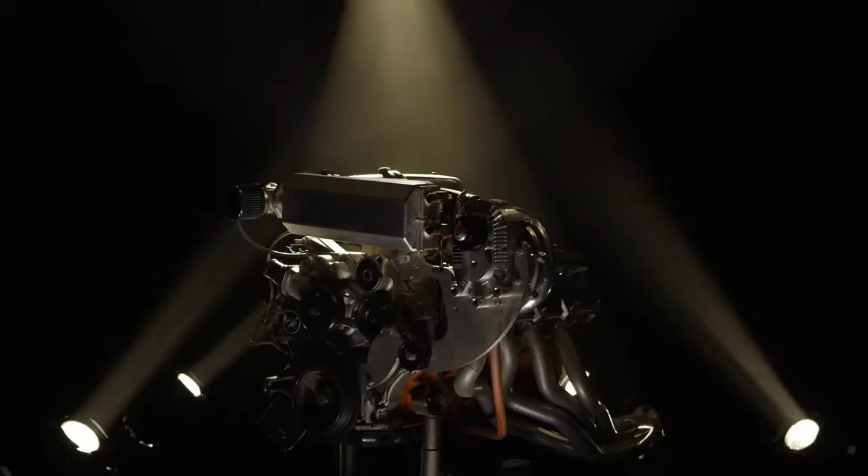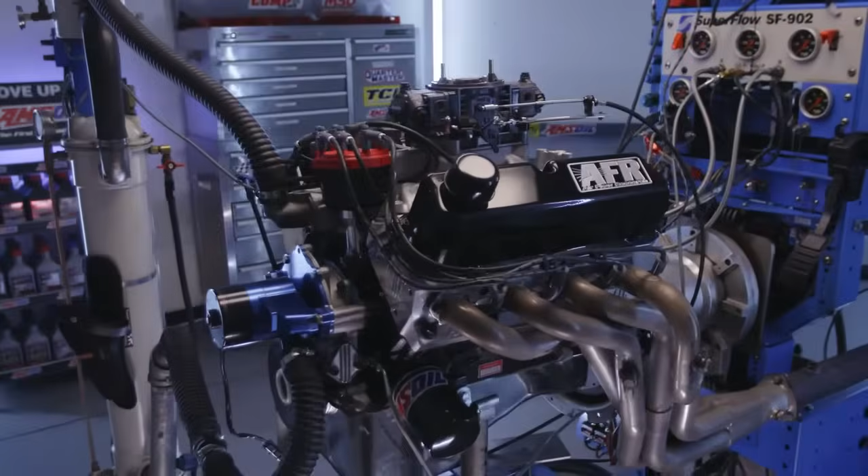This episode is going to be a deep dive on how to buy the right cylinder heads for your engine. And actually, the data here is being applied to a small block Ford, but really, it's kind of broad across any engine family because all we're dealing with here is airflow and the dynamics of the volume and the cross-sectional area of the intake port.

And we're doing that specifically by testing 3 sets of Airflow Research Renegade cylinder heads. Now, one of them has a 165cc intake port, one of them is a 195cc, and one of them is a 220. Now, the common internet theory is that you can put too big of a head on your engine and therefore lose bottom end torque, and that's what we want to find out.

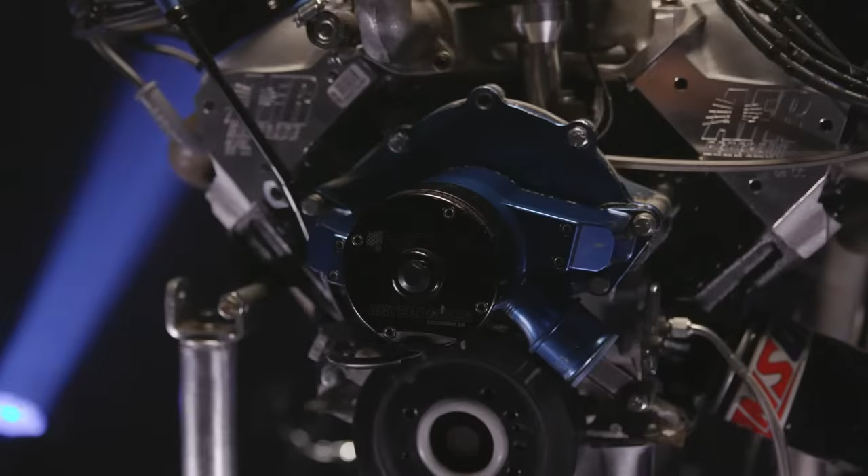And to do that, I've assembled an engine that is a really, really calm street going motor. I wanted to keep the airflow and the RPM down so that we could do the best job possible in finding out if too big of an intake port really does kill torque. The engine itself is a 410 cubic inch stroker that's based on a Ford 351 Windsor. The short block is from Blueprint Engines. You've seen it a bunch of times on Engine Masters. It's been really good to us.

Up top, the Holley XP carburetor, an 850 double pumper. The intake manifold is an Edelbrock dual plane. Best thing for the street, best thing for torque. It's a Performer RPM air gap. We've put MSD ignition in it.

The cam itself is really small. The duration at 50 thousandths tappet lift is 218 on the intake, 224 on the exhaust. Very low lift at half an inch, 0.513 inch lift, and it's on 110 degree lobe separation angle. The engine itself is about 10.2 to 1. The exhaust system is a set of open headers, Hooker Supercomps in a 1 3/4 inch tubing diameter.

What we're gonna do with this is run those 3 sets of heads across it with different intake ports, and there's a few other features that they have that are different as well, and I'll spell that out later. But we're gonna start out with the tamest cylinder head that Airflow Research makes for the small block Ford. It has a 165cc intake port, and it's the most affordable one that they make. I'm really concerned that it's just gonna choke the power out of a big 410 cubic inch small block, but you never know until you go strap it on the dyno, which is what we're about to do.

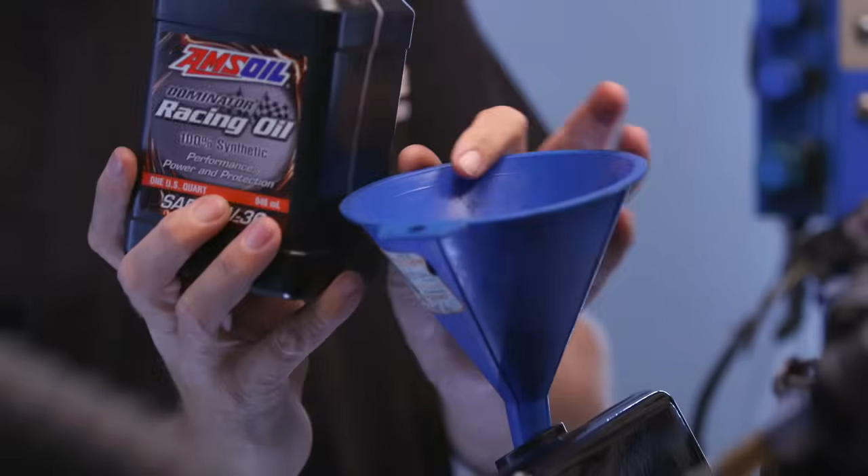Yeah, this is the single smallest camshaft I've ever intentionally installed. So you're turning into me, you're turning into a top of the page guy instead of a bottom of the page guy. Yeah, smooth idle, nice drivability. I still think these cylinder heads are gonna strangle it with that 165cc intake port. I agree. I gotta tell you, I got a chance to look at this thing before you guys got here when I was getting it up, and this thing's pretty good. I kind of have a new favorite combination: big motors, small heads, small cams.

So, it's heresy. I want the small cam and the gigantic heads. Yeah, well, we're going to see. Magic.

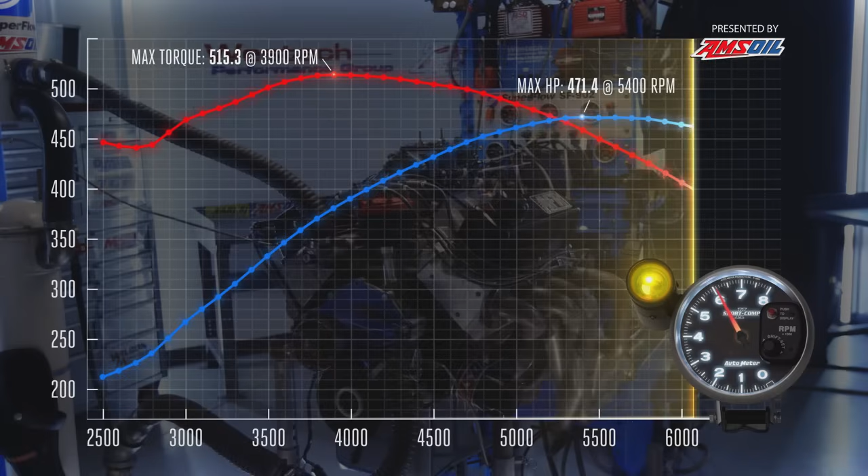That's ridiculous! In your face. What? That's what I was saying. I was looking at the curve when I pre-ran it. Yeah. And I'm like, oh wow, would this be fun? I mean, this thing's got 450 pound-feet at 2,500 RPM. And what was the peak? 520? Let's look at it. As far as torque, it's really good.

I was just blown away by the torque curve on this thing. Look at that. We just made 515 pound-feet of torque and 471.4 horsepower. I didn't see that coming either. I know, that's what I said was so good about it. Because it's kind of as good power-wise as a good 383 stroker or something, but they don't make this kind of torque. They don't make 500 pound-feet, and they certainly don't have that kind of drivability.

Yeah. Now you guys know why I bleed Ford blue, right? Are we only going to ruin it from here?

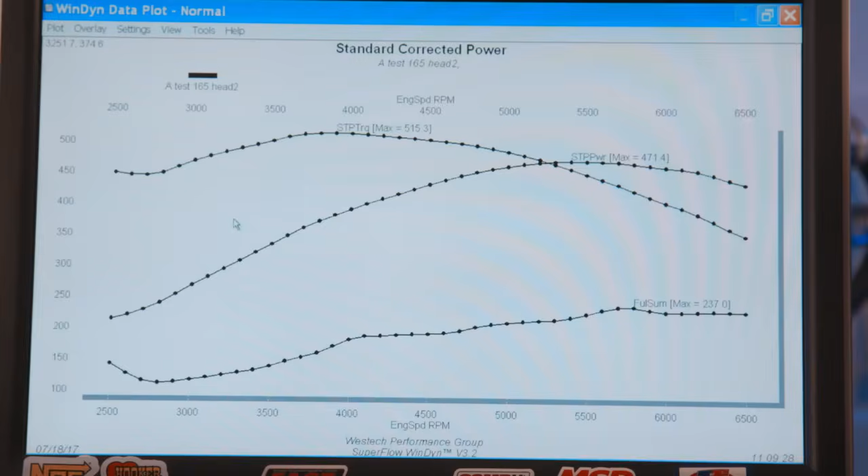Well, if we take away from here and add to there, then it's kind of driver's decision. But as long as we can hold on to this and pick up some of this, then that's going to be a win. Can I go out on a limb here? I'm sure you will anyway.

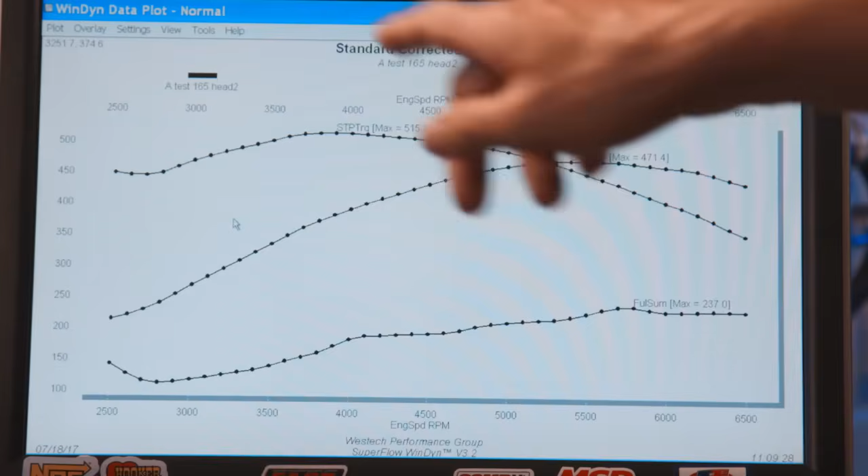I really don't think that the intake port cross-section is going to affect that very much. But the size increase of it, airflow has got to make it better. Here's the question though. What does it do at part throttle? We're going to look at full throttle, but what's it do at part throttle with a big head versus this thing? This 165. Yeah, we don't know.

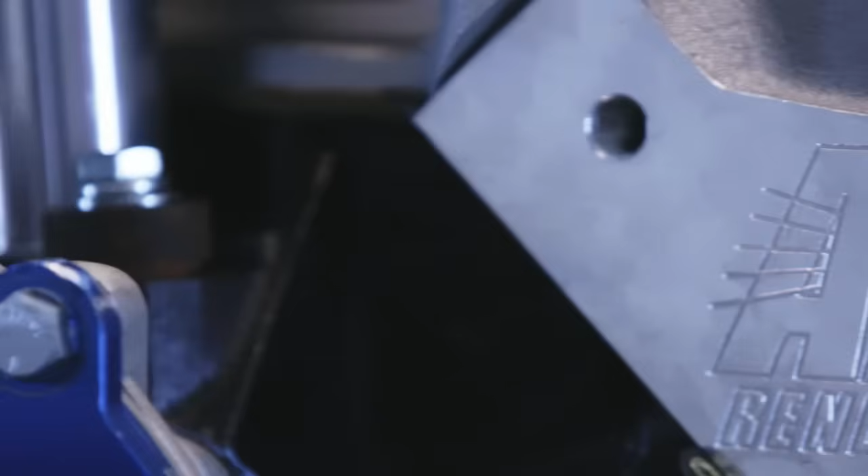Okay, the reason that was mind-blowing is that none of us expected a 410 cubic inch engine to be able to make that kind of horsepower and torque through a 165cc intake port. That is considered very small. Typically, you'd think of that cylinder head for like a 302 cubic inch engine, but I think what that taught us is that that number alone is not everything when you're buying a cylinder head, even though it's normally how people refer to heads. For example, these would be an AFR 165, 195, and 220. That's the lingo that people throw out, but there's more to it.

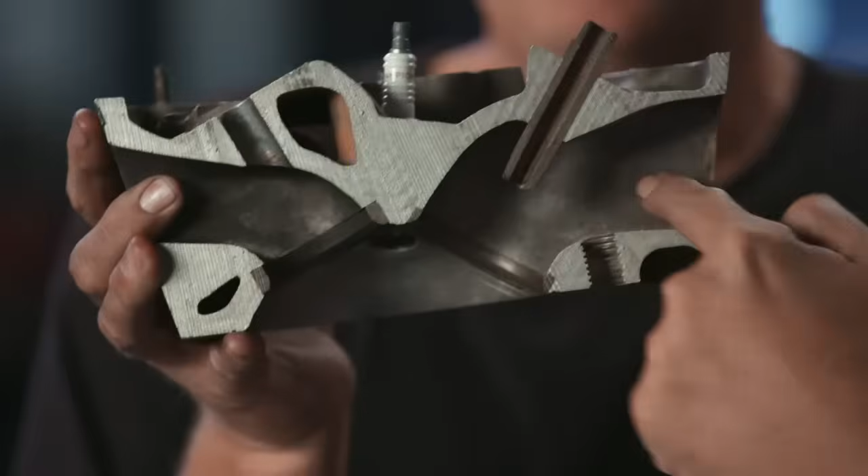Let me explain to you what that CC number really means, and I'm gonna do that using this cutaway of a Mopar 426 Hemi cylinder head. This is actually a Keith Black head that was given to me a long time ago, but it's super handy for showing stuff like this. So imagine you've got your intake valve right here and your exhaust is over here. This is your intake port, that's your exhaust port.

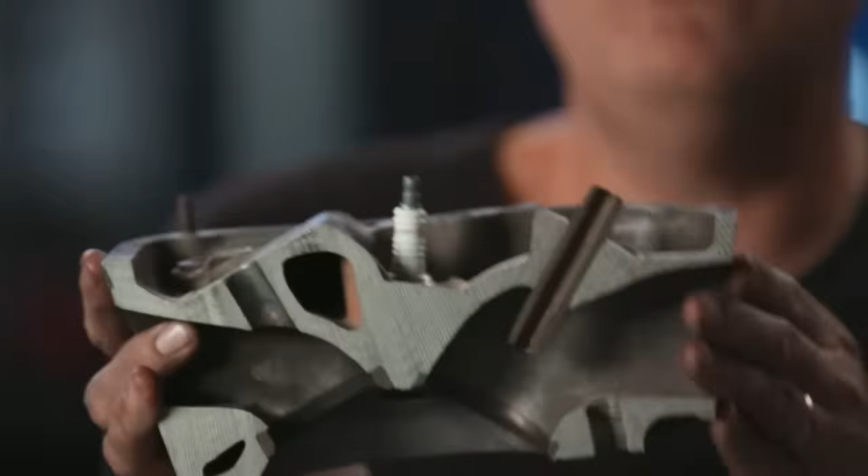Now, if there was a valve in here sealing it off, and if you were to fill it with water up to this face right here, which is where the intake manifold bolts on, then you could measure that volume of water in cc's and it would tell you the overall volume of the port. That's where those numbers come from. But there's another thing that you need to know. It's called minimum cross-sectional area. It's the smallest point inside the intake port, and it's another number that people use to sort of evaluate if a cylinder head is in the range of what they want to use or not, and that would be right here on this cylinder head.

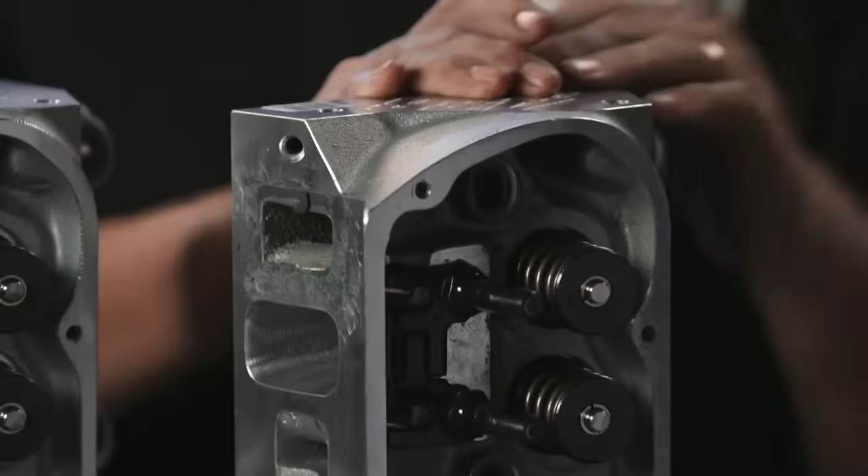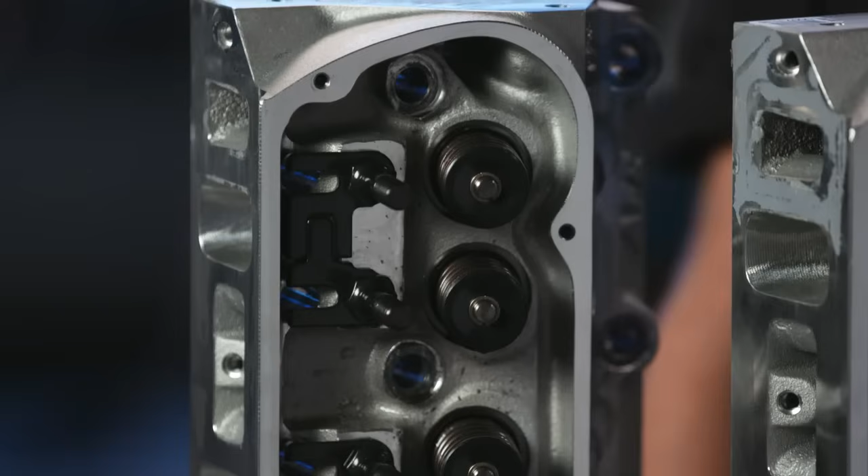So that changes on the AFR heads as well. For example, the 165cc has a pinch or smallest cross-sectional area of 1.935 inches. Then you move on to your 195, and it's got a 2.075 pinch, and on the biggest head, it's actually 2.375. So you can see that the size varies a lot, and the theory is that the bigger the port is, the more you can tend to lose low RPM torque, and that's what we're gonna find out today.

But let me tell you what's the same about the three cylinder heads that we're gonna test before I tell you about what's different about them. First of all, they're all from Airflow Research. They're all from the Renegade line. They're all CNC ported and they all have a 58cc chamber on them. So the compression ratio on all of these is the same. The other thing that's important to note is that the rocker arm studs are in the same place on all of these, so you can interchange them without having to worry about rocker arm geometry and pushrod length and stuff like that. Now here's some things that are different about these cylinder heads.

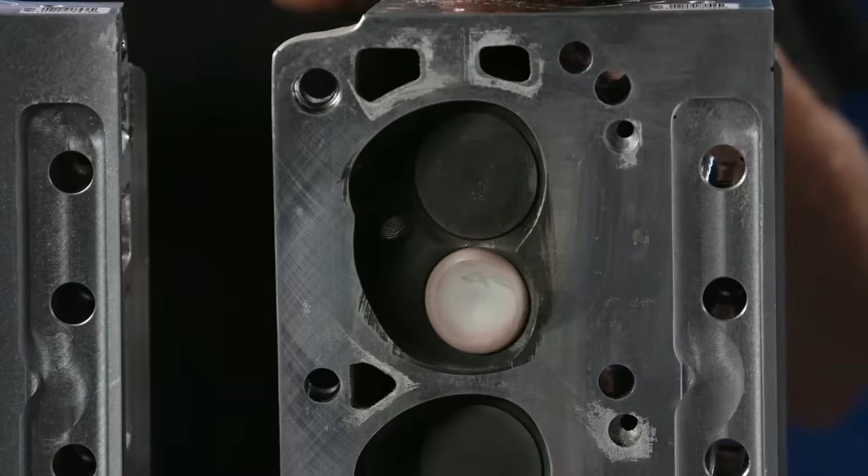The valve size is one of them. On the 165 head, you have a 1.94 inch intake valve and a 1.6 on the exhaust. The 195 head that we're just about to bolt on has a larger 2.05 intake valve and a 1.6 on the exhaust. And the 220 head, which by the way, this isn't one of them, this is just a prop, but the 220 has a 2.1 inch intake valve, and because that's so big, they had to reduce the size of the exhaust valve to 1.57.

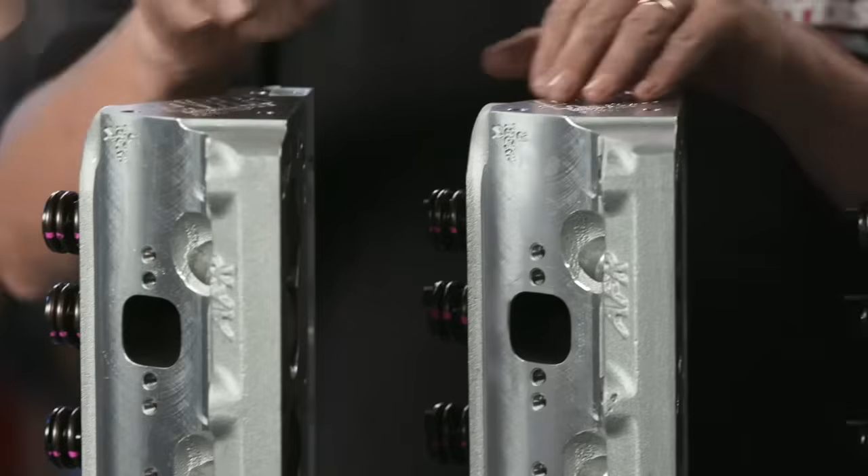Another thing that is different between the various heads is going to be the exhaust port. They know as the head sort of gets racier and racier that you need more flow not just on the intake side but also on the exhaust. And for that reason, the exhaust port is 68 cc's on the 165 and it's 70 on the other two. But the other modification is that the exhaust on the 195 and the 220 is raised, which tends to improve flow. On the 195cc head, it's raised 0.125 inches, 1/8 of an inch. On the 220, it's raised 0.375, 3/8 of an inch.

Now that can be important to you if you're buying headers because sometimes they won't fit if the ports have been changed, and you can see that on the two bigger cylinder heads, the exhaust pattern is what they call double drilled.

There's a wider pattern and a narrower pattern, and especially on the 220, it's possible to put a header on it that can block a little bit of that exhaust port flow. So what we're doing here is not just scientifically testing the intake port design alone. Instead, we're gonna test what you can realistically buy off the shelf from any manufacturer for any domestic V8 engine that you might have. Because this technology applies to anything, a Chevy, a Mopar, whatever.

And we're gonna do the best to sort of bench race that out and get some solid data when we go to the dyno and remove the 165 to install the 195cc head as our next step. And finally, we're gonna wrap it up with the AFR 220 and find out if, like the internet says, too big of a head can kill torque.

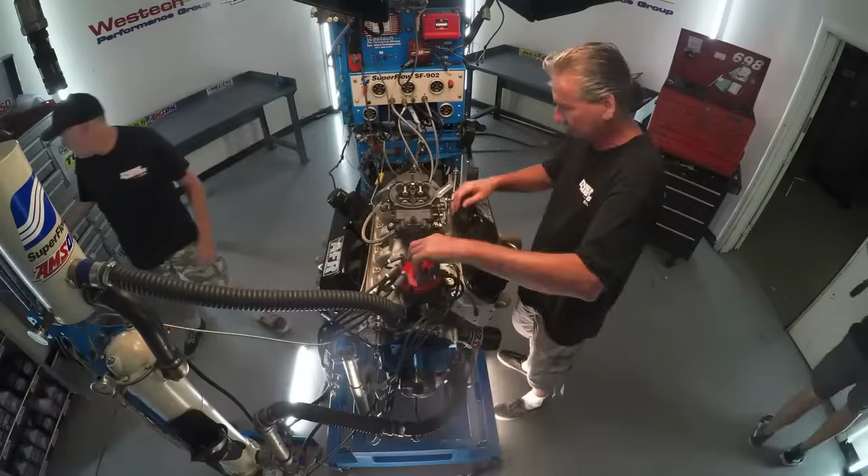I've got a really simple theory when it comes to heads, port size, and velocity and all that. Bigger is better? Oh man, you just totally stole my thunder. How did you know? I've met you.

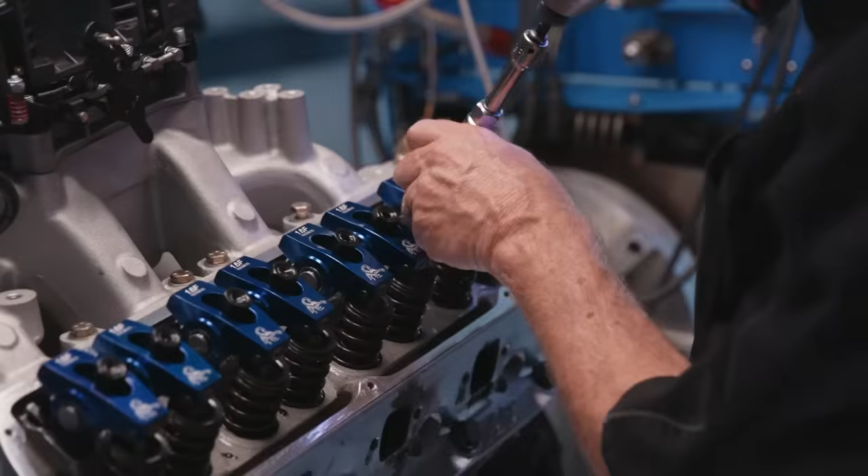I think here's a good tech note. On some of the gasket manufacturers you'll see on the Ford gasket where it says front, but this one actually doesn't. So you need to be smart enough to know why. In both the cylinder head and the block, there are water passages. It's the head gasket that determines the direction of flow. So if we were to have put this gasket on this way, the water is going to enter the water pump, come through the cylinder head, come right out here into the intake manifold and back out the front. This whole part of the motor would have zero flow. I did not know. That's so good.

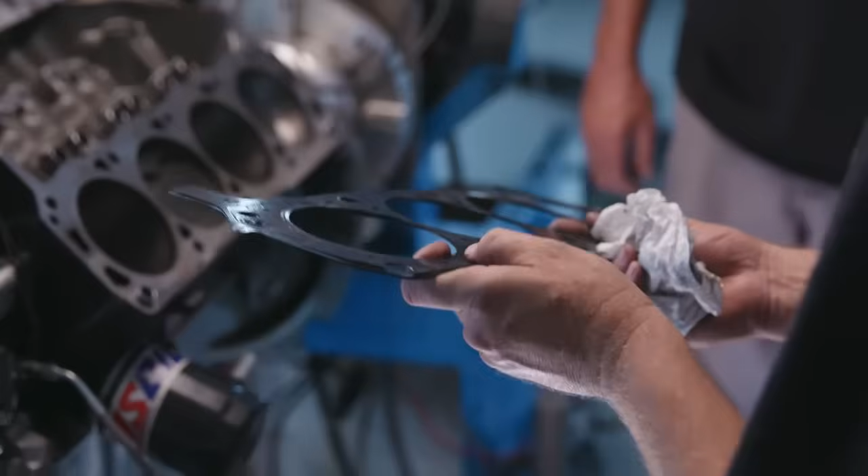Now we do this, and all the water goes to the back, forced all the way to the back, comes up the back, through the head, out the water passage, so it circulates and flows and cools the whole block. Also, did you notice this is a Mr. Gasket MLS? I did. Their claim is that the coating on this does not require as smooth a surface as some of the other ones. Oh, interesting, because a lot of them give you a specific RA finish that you have to have to use the gasket. They say it can be a little bit rougher.

Just so you know, that's my one and only Ford tech tip for the year. It was really good. I liked it. I only have two. I'll save one for next year.

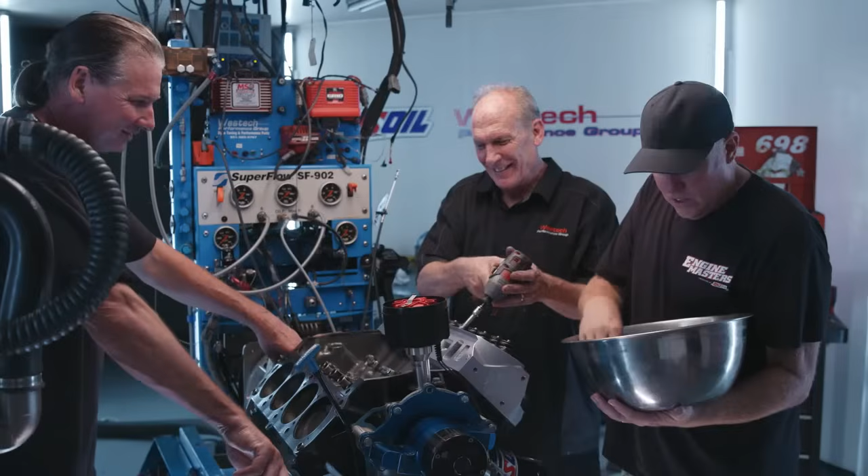195 cylinder heads going on. Here comes a winner. You know what else is really cool about the AFR heads? What? 8mm valve stem. Oh, that's really good. Yep. Kills some weight, flows better. Yeah. Good.

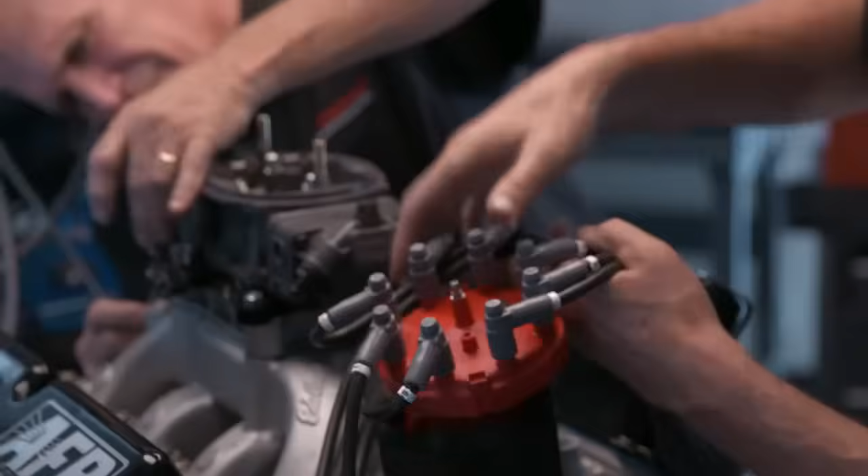I'm confident it makes more power everywhere. That would be cool if it did, because it made really good power before. We have a pretty big step to go up. It flows a lot more. But the valve diameter is good on this head. I like that. Will it make 500 horsepower? We're gonna pick up 30 numbers. No. I don't think so either. Well, blurt out a number, Steve-O. Come on. 493 horsepower. Well, we were at 470, right? Yeah. 500. Dulcich called it. I can't naysay it, because he's Dulcich. Come on, baby, wizard of all wizards.

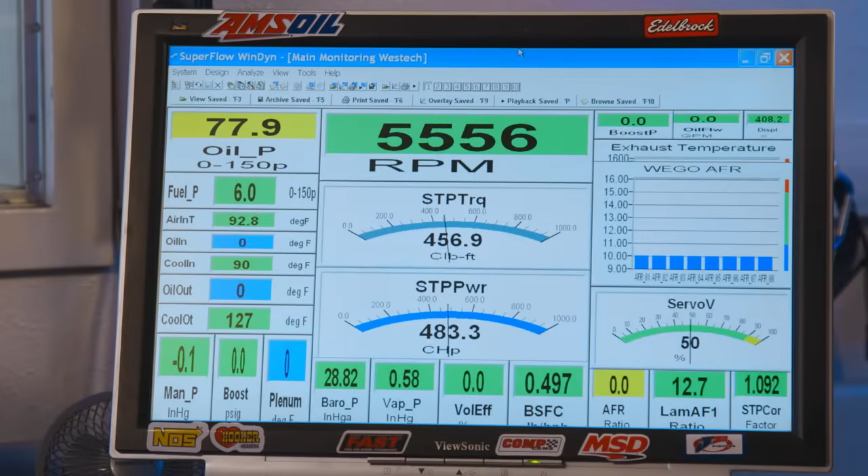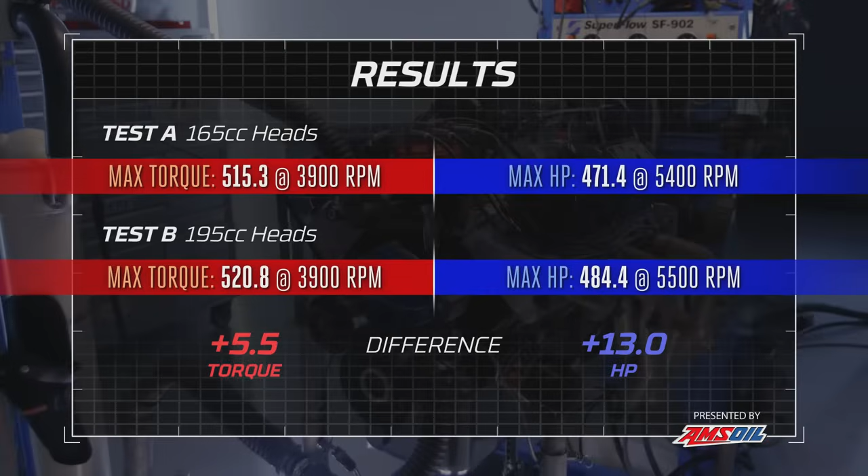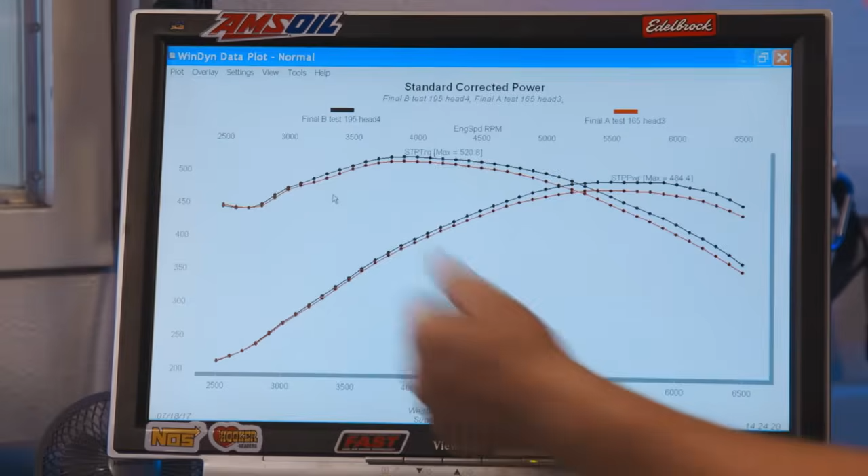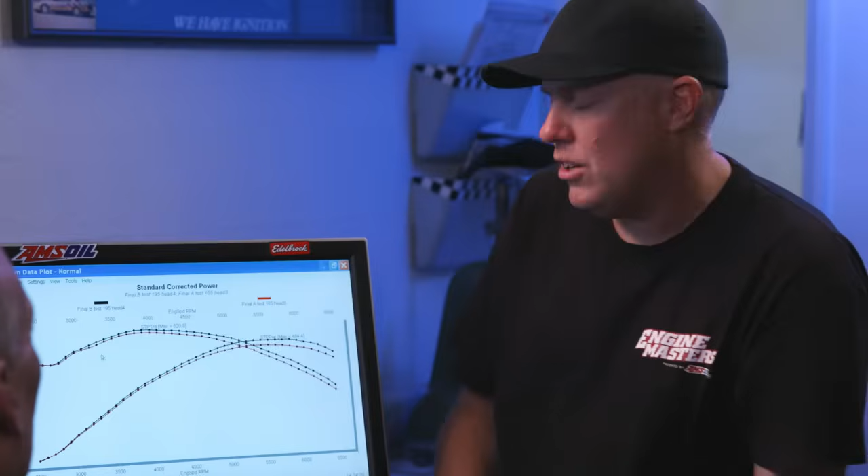Not quite there, but still really impressive. I had a pretty good feeling when it came in about 5 pound-feet better. So at this point, with this cam, this is a better cylinder head. Absolutely. The bigger cylinder head makes more power, kind of no shock whatsoever, really at every single point in the curve. This stuff down here is like 2,600 and below, and it's the same down there. So we made 520.8 pound-feet of torque, 484 horsepower, with a really broad spread. Almost 1,600 RPM between peak torque and peak horsepower, which makes for a really nice engine.

You know, I don't think the big surprise is the 195. I think the big surprise is how good the 165 is. It's amazing. It still blows my mind. I'm really shocked by it. The thing we don't know is throttle response, transitional throttle, part throttle. We know the airspeed has got to be faster through the 165 head, and that leads to better tip-in. I know with the 165 the part throttle, transitional throttle response, all that stuff, would be really good. And on this big of an engine, even the 195, it's got to be excellent.

It's got to be. But now is the 220 going to finally lose some torque, or are we going to see the same torque and even more power? I say same torque and more power here.

I think every internet forum on Earth claims this is going to be worse, killing torque, right? Really? Yeah, I think they do. I don't read the internet enough, apparently. Consensus would be it's too big. Yeah, too big of a port. It's just like Goldilocks and the Three Bears. The other heads are probably just right, but probably not. I'd say Papa Bear is the best.

The fail in our test here is I chose a 410 cubic inch engine. Had you chosen a 302 and started with a 165, you'd have found out that a 220 might be too big at some point. I tried to compensate for that with the small camshaft, you know. And then you just made more torque. All I did is make more torque. How are we going to live with ourselves if it actually makes more power everywhere? And I think people will tell us we're wrong. I think it will. I really do. I think it will too.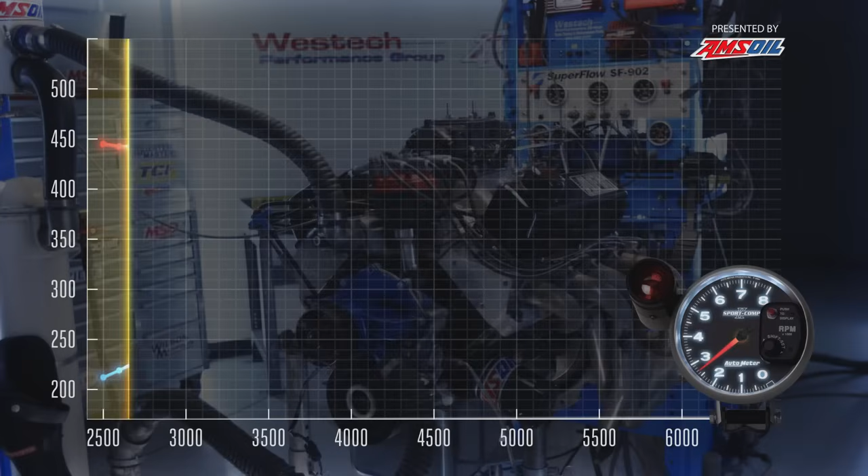It's the same as the 165. Yeah. After all of that, I'm not sure we really proved anything. It proved I don't know anything. I know, I don't know anything either. I mean, I think that 165 is a killer head. I think we proved the 195 is the logical one you really should run on an engine like this, even if you've got another 20 degrees of cam probably.

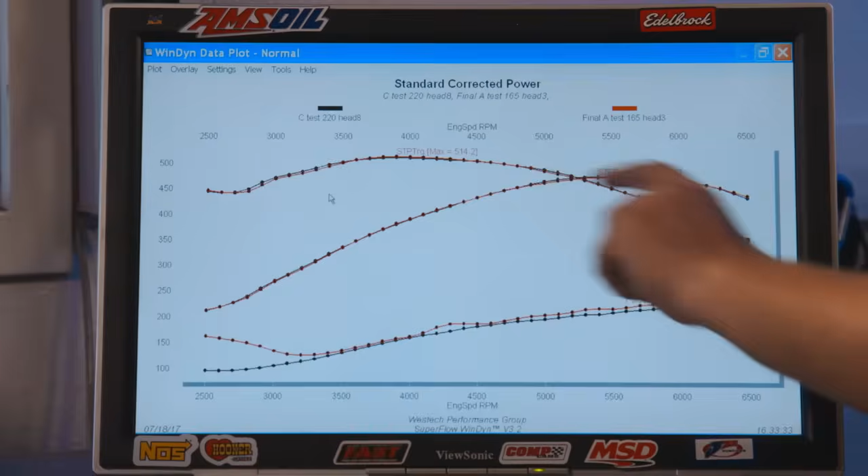And if it's anything bigger than that, you want the 220 with the correct single plane intake manifold and the correct solid roller cam and the correct big header, and making peak power at 7,500 RPM, and all of those things that head is designed for with that kind of flow number at 800 lift. But this is the craziest thing: these numbers we have on the screen right now are the 165 head versus the 220. They essentially run exactly the same. So my walk away is throw the 195s back on this thing and stab it in a Mach 1 and have a great time.

Ready to go wrap this up and try and package all this information into a believable ball of BS? Oh, no. Believable or unbelievable, the numbers are the numbers. They're just a little confusing, you know. I've got it all put in a box, man. I get it completely. Well, go spill. Let's do it. Okay, Steve, open up your big box of wisdom.

Well, I've got to admit, the 408 Ford took me to school. Really? How? Yeah, my whole theory of bigger is always better kind of let me down for the first time. So what's the point, Dulcich? Well, the point as far as I'm concerned is we didn't lose any low-end torque, and that's really what people talk about with bigger heads. We made great power with a tiny head on a big cubic inch motor with a tiny camshaft. So I guess really there is no conclusion. Well, no, there is because of what you're talking about. I think we are starting to see stuff we've never tested before where a good cylinder head with a tiny camshaft is a great street motor.

And that's probably something a lot of people have known for a long time, but we're just discovering it because normally we like giant cam stuff. But the whole thing about proving that a large port kills low-end torque, we didn't see that at all. But to be fair, the dyno is not really showing throttle transitions and things like that. So I'm not sure people can conclude categorically that you should always put the biggest cylinder head you can on your engine. I don't think that's the case. I think the 195 is the right cylinder head for this combination.